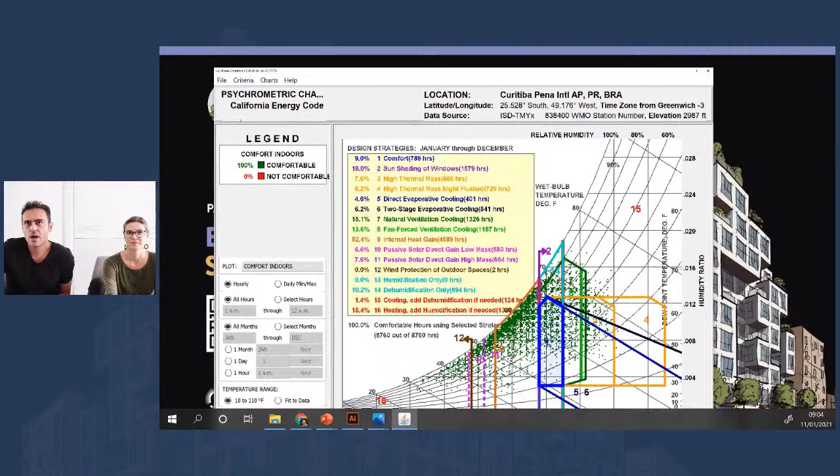Guys, we are going to share some slides so you can watch during the content, it's not going to be just us doing gestures. So we are going to present here: the first day of the Sustainable Architecture Week is going to be the behind the scenes of sustainable projects. We are going to show you guys some strategies to find sustainable strategies, it doesn't matter where you are. We are going to show you also some projects. We have this housing project, and we are going to show a mid-rise building as well. This is going to be the first day of this week, the behind the scenes of sustainable projects.

And who is going to be presenting this event? So my name is Philip Boni. I am an architect, LEED BD+C, and I will be one of your guides on this 5-day journey. And I am Semi Mira. I'm also an architect, LEED BD+C. I have been working with architecture and consultancy in sustainable projects for a while now. We're going to talk a little bit about our journey in a bit.

And the third person is Tiziana, she's going to join us in the second day. She's over there, actually. Let me show here, Tiziana is going to be here. Hi, people. She's going to be here in the second, the third, and other days in this event. So we are very happy to present you guys our team, our main team that does the presentations here at Ugreen, that is our company. We are going to tell about our history as well a little, so you can know us better.

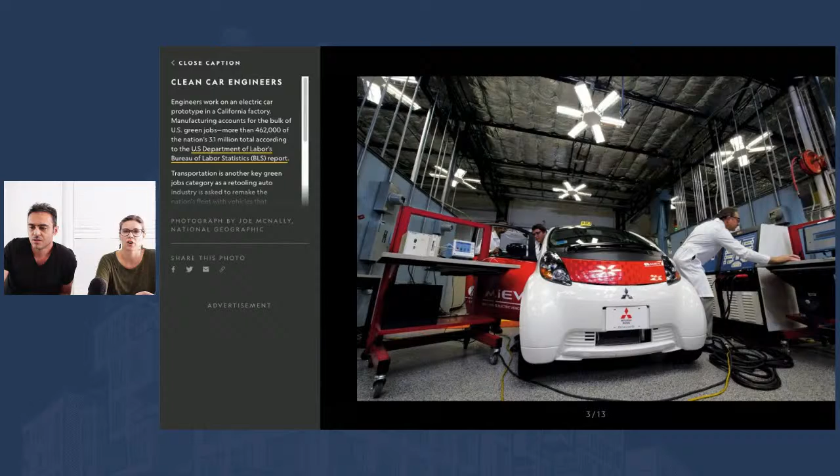So you can go on to the next one. Recyclers, absolutely. We don't have any more space on our planet for the amount of waste we produce, so we have to recycle and reimagine materials. This is something that's most important, and a lot of places are having big problems not recycling. Yeah, lots of materials we are making, so we need to do something with this. Exactly, we are drowning in our own waste.

Natural scientists, well, we keep researching. This is something that's not going away, and we're just finding out that nature has more answers. More and more we find that we have more answers from nature than anywhere else, and we are finally admitting that we can learn from nature. This is something that was important and is going to continue to be important, and more important over time, as our time is limited.

Yeah, exactly. We are also going to have solar cell technicians. We're making huge improvements in energy efficiency of solar panels, and there are lots of things studying this. We had solar panels with 12% efficiency some years ago, 3 or 4 years ago. Now we have 17, 19%, depending on the case. So this is developing really fast.

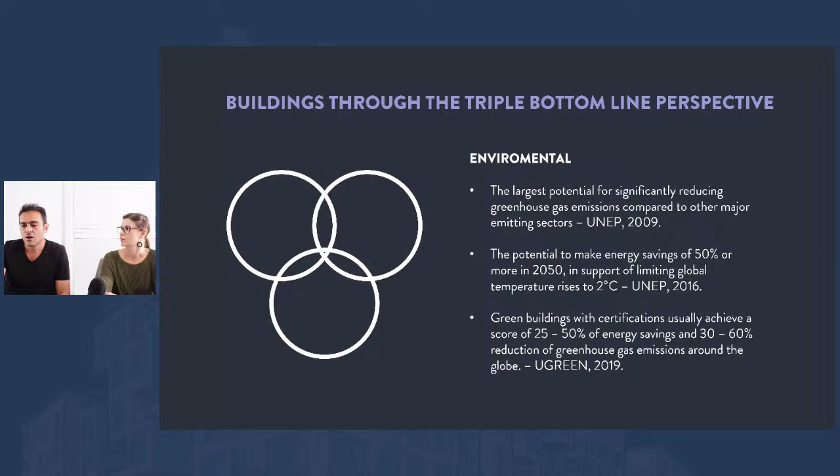And from the economic perspective, we can save money for tenants or households. We can have lower construction costs, higher property value, as we said before, and increasing occupancy rates.

7%, I think this is one of the biggest things, a 7% increase of asset value over traditional buildings. So if the building costs more, we get 7% more value, but it doesn't actually cost more. So you get 7% for free.

Most of the time, if you are doing sustainability right within your design, following a process from the beginning, sustainability will not cost a whole lot more, or sometimes it will cost less. It's just about understanding how you design, where you apply sustainability, and most importantly, when.

Social benefits: workers in green buildings can have a 101% increase in cognitive score. We brought this data from the CogFX study, and we got another one from Harvard from 2015. We want to bring more data so you don't just see one side of things, because studies sometimes have different results.

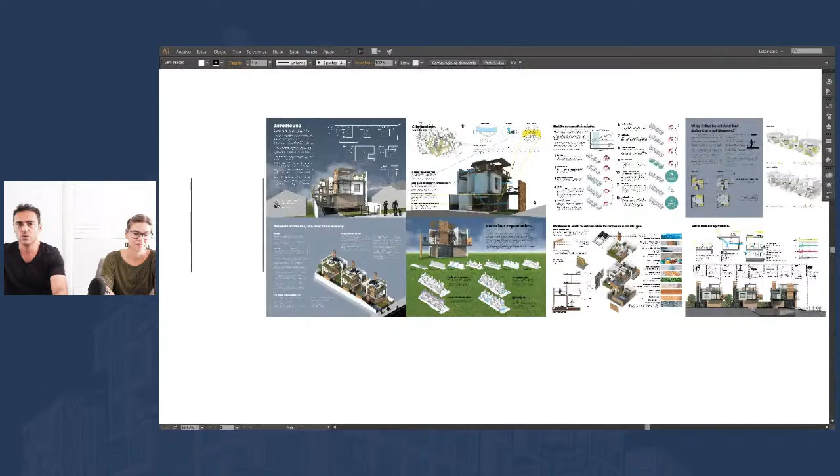Let's go, guys, behind the scenes of sustainable projects. We are going to show here a project. It's going to be this project here. This is a housing project.

We have a building project as well to show, but this is a house that we developed with sustainability in mind. Here in Brazil we have building sites with these dimensions, and we did this project to overcome a problem here in our country where people build a little building in a very large site. So we wanted to make this infill process, putting 3 houses in the size of 1, to overcome this density problem and also this housing problem that we have here.

We have this deficit, this lack of housing, and so we wanted to bring more houses for people because this is a very great problem here in Brazil. And we wanted this house to be a net zero house.

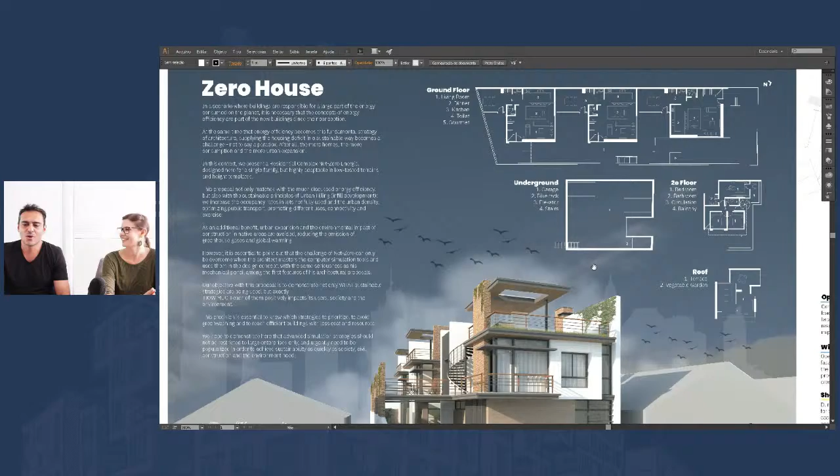So you are going to understand this process behind this net zero house, and of course you're going to get this summary. We put this in English very quickly because it was originally in Portuguese - we presented this project here in Brazil.

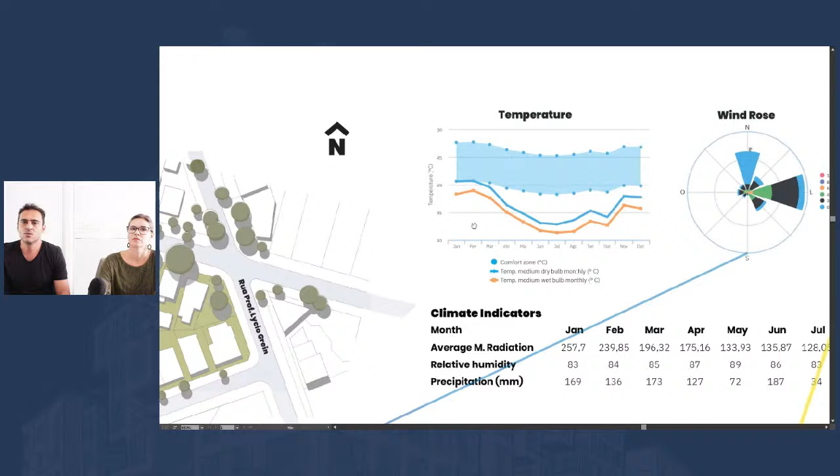To understand things better, you need to understand the climate. To make a project in a very good way, you need to understand the climate strategies. So we have this temperature data, you can see our history, our story, and now you know our temperatures, how they go. We have this comfort zone, and we need to make a building that can overcome this problem. Curitiba - most of you probably don't know it - but most of our hours are in the uncomfortable zone. We have a lot of changes.

Like in the morning we have, let's say, 12 degrees Celsius, and in the mid-afternoon we are at 30. So our gap is really big, and we enter the uncomfortable zone very quickly here. We have a very different climate. We are 900 meters above sea level. So we have this climate that's very challenging to work with for thermal comfort.

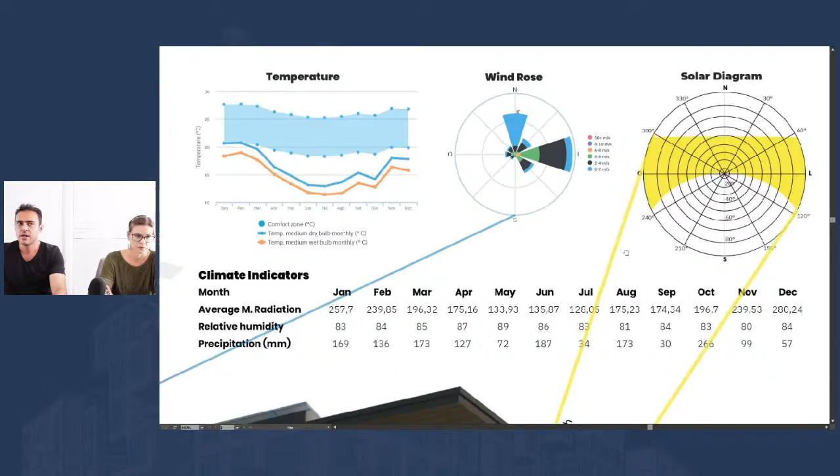So we have this wind from the east. We are going to use this, of course, and the solar diagram as well, right? And then, of course, we are going to mitigate the sun in the summer.

Here in Curitiba it's very hot right now, but usually it's not. It's January, here is summer, right? So in December we used some shading devices.

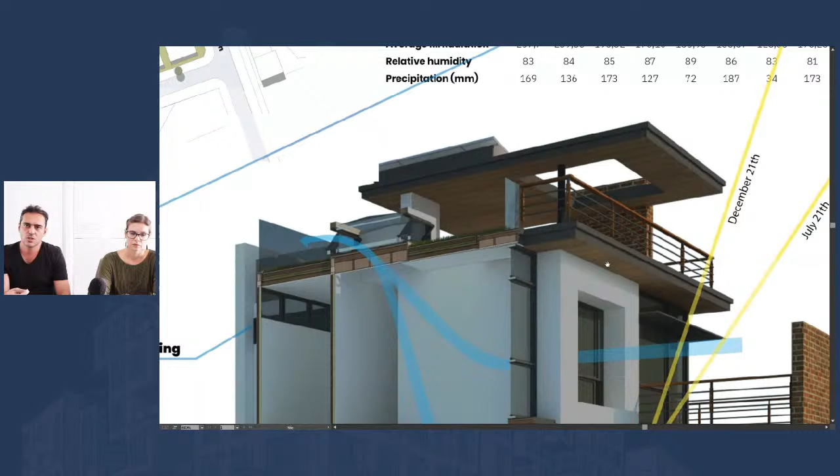And of course, this shading device, this distance, it was made on computer. It wasn't something I just put up and see how it goes. We measured on computer 80 centimeters, 1 meter, or 60 centimeters. We analyzed this and saw the impact on performance. So it's a very important thing. And this is east, so we got this principle in our project.

And we have here other important data, such as precipitation. So we can use this to measure how much water you can have in your building, to overcome flood, and also to save water, to use this water for some appliances of our projects, right?

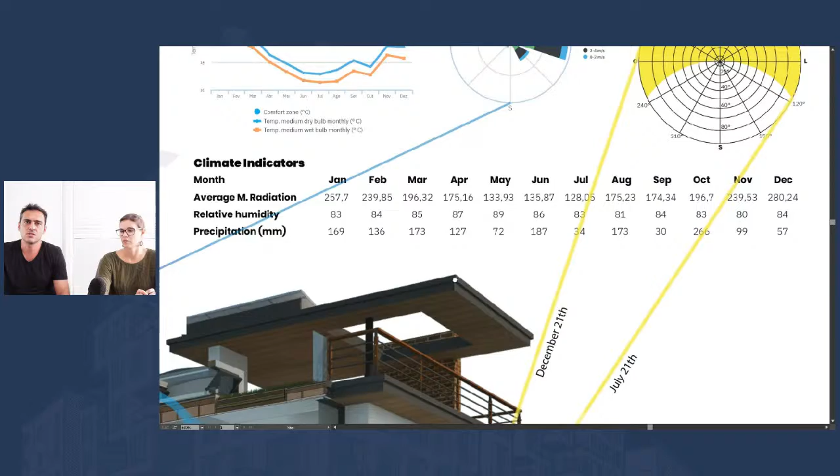Then we have humidity and radiation. We are going to use this as well, right? To measure energy, to use in simulations on energy efficiency, and of course for the solar panels that we have, 6 or 5 solar panels above the building, okay?

So these are important pieces of information that you have to gather at the beginning of your project. If you don't start with this, if you start with the form, if you start with the beauty of your project, then you already didn't give your first step towards sustainability. Your first step is to analyze your microclimate, your local climate, so you can understand how to use passive solutions.

And we're going to show you here a tool that you can use to analyze the climate in your region and start making this analysis from day one. These are important analyses because they will define how big your roof needs to be, how large your walls, what kind of materials your walls need, how many windows you can have, or where your windows are going to be placed, where you need more green to help with thermal comfort.

Where you can have the best location to avoid sunlight that would also increase your energy bill with tons of heat, or where you need the sunlight if you're in a cold zone. So the building orientation, all these things that you can direct in the first ideas of your building can reduce the amount of money you will spend on systems, things that cost a whole lot of money and that sometimes come later.

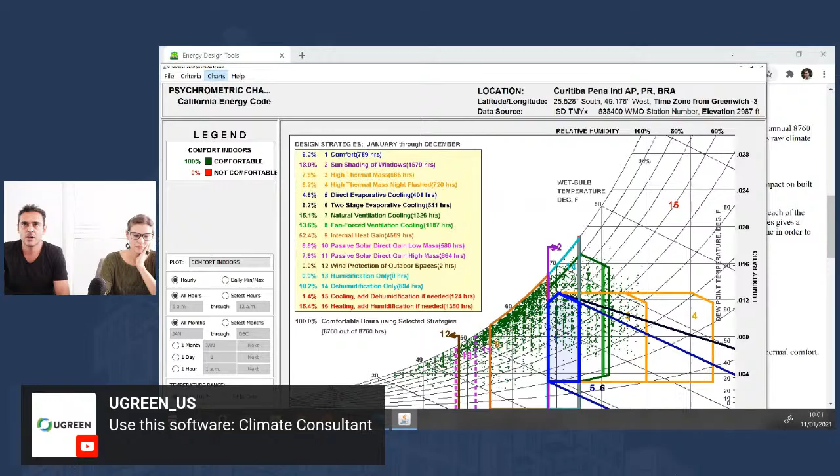And you are going to open the software, okay? I will just open a new file here. I will just click on this and click on file. Okay, start new project. I will click no. And now you will understand my climate, okay? Open existing EPW weather file, okay?

So we are going to get this file of my climate, okay? So this EPW, Curitiba, is my town, right? We have some others here: Manaus, a place in Brazil, Salvador, Abu Dhabi, right? São Paulo, and we have Lisbon, we have Egypt here. I know there's people from Egypt here as well. Phoenix, Arizona, so we have some places here. I will just open this, and of course you can get this climate data.

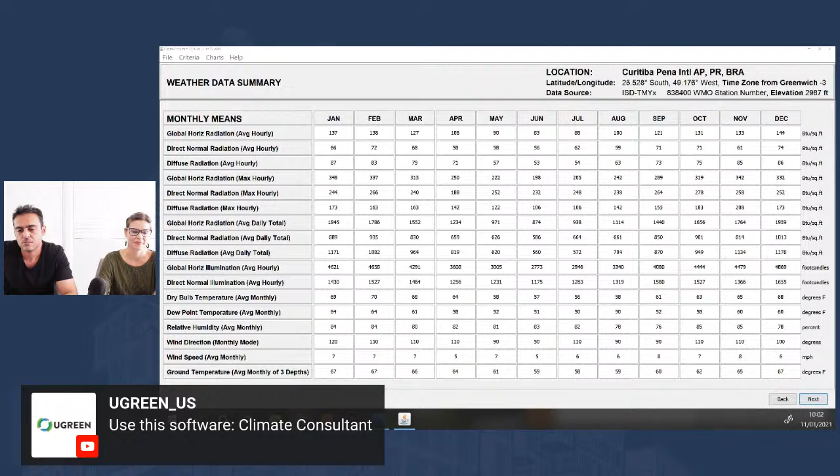I will just put up a very cool website that TC brought me some days ago, and this is the website that you can go to, okay? Ladybug Tools, so you type this, Ladybug Tools. I'm going to comment here.

Usually you are in the right place when you see this thing, this Ladybug here, in the images. You click on this, Ladybug Tools, and you can find the data from its EPW map. I will show you here: Ladybug Tools, EPW map, and you are going to find this EPW map. The file that you are going to use is EPW.

Let me hide this current comment here. We have climate data from the whole planet, right? You can get this, let's say one of this, you can just go here. All this is free, guys. You can access this Ladybug tool site for free, and you can access a climate consultant for free as well. If you are wondering, everything is free.

You can download this from one building website. You can just go to the map and find this. Since you already downloaded this, you need to open your climate consultant, and you are going to open this as start new here. Well, sorry, it's not appearing here because it's appearing in other screen that I have. So you can start a new project. You can click here and open existing EPW file, and you are going to find it on your computer.

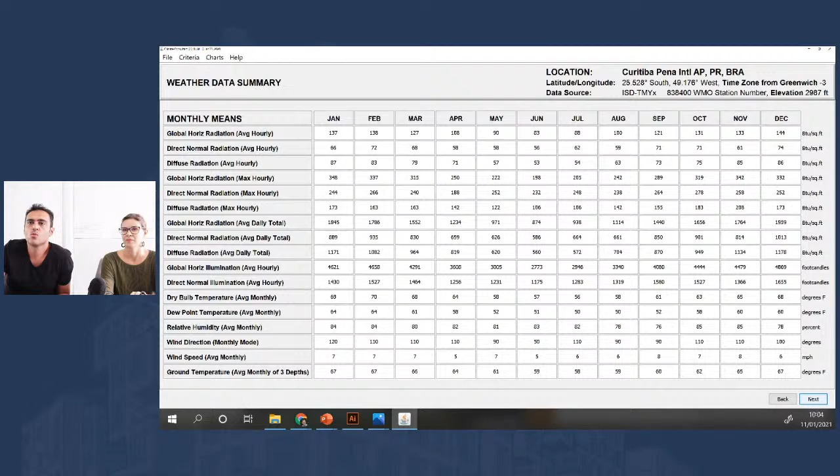So we are going to summarize this in just one screen. You're going to have lots of good things here. I'm just selecting this - ASHRAE 55 is one of the most complete things that you can analyze. I will just pass this, okay? You can change a little things here.

Now you can see the temperatures, right? We can see here in green our comfort zone, and the temperature, how it goes. So we have this medium temperature going up and down, and this mean temperature as well, and this higher and lower as well. So you can analyze this, but this is not the main thing that I want to show. We have this radiation thing as well. Maybe other things we can go here and talk more.

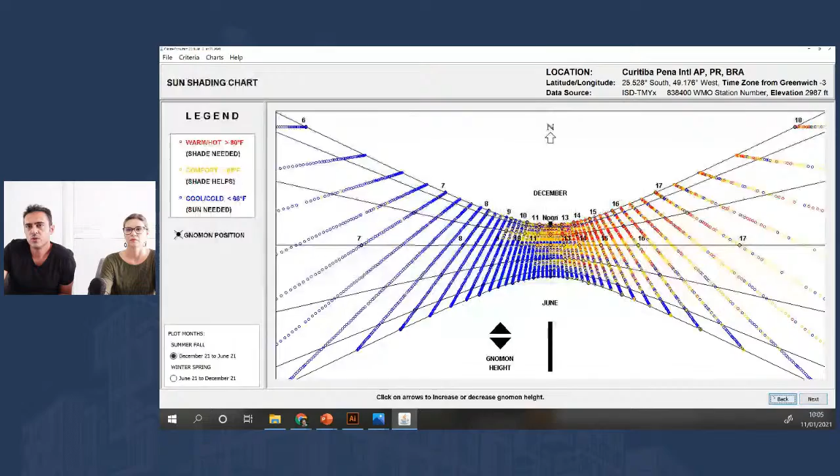But I like this thing here that you can use for your brise-soleil calculations. If you are not doing a building simulation, it's a great tool. And I love this, we have this 3D data, very cool as well. You can analyze lots of things during the year, but this is the thing, in my opinion.

And I want you to pay attention to this, very close attention, because this is what can make a very great difference in your project. So on the first day, you're going to get this. And what is this, guys? Just to mention for you.

So we have these green dots here. You can find these green dots here. This is the temperatures in the whole year of my city. So you can see here 10 degrees - we have Celsius. No, I'm just going to change here for degrees Celsius, okay?

Change units, Celsius - sorry, I thought it was Celsius. Let me just find here the units. I'm just clicking one screen and showing in another, it's very annoying. Change units, yes, metric. Okay, so let's go there again.

Now we have metric units, and we have 10 degrees negative, of course, and 40 degrees. And now we can have this temperature, understand this. Of course our city here is between, I don't know, 5 to 22 in most of the hours. Yeah, most of the hours, and humidity ratio as well. So we have a high humidity, you can see here, in most hours, and this temperature between these steps.

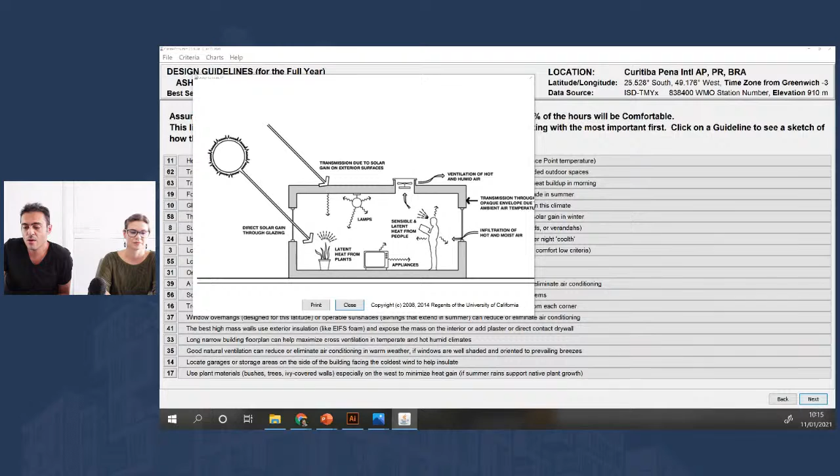So I've clicked on this heat gain here, and here's the strategy. You can do this, you can get direct solar gain through glazing, heat gain from lamps, heat gain from your surfaces and appliances, and even from people. So this is one strategy that's welcome in my city, right? People here in Curitiba are going to benefit from this. And for other strategies we have drawings, so you can find and understand them better.

Let's see here, glazing, right? We can use better glazing, better glass. Maybe I can find some glazing here and show people. Yeah, we have it here. We can use this glazing, right? We have some glazing strategies here, and this is very cool because we have this glazing with no color, and these two with intermediate color. So this is something you can do as well, use the best type of glazing. I'll speak about glazing in a few minutes, okay? I'll just finish this here, and speak about glazing later.

But we have this strategy, so we have these best strategies in order, so you can use them in your projects, okay? Guys, I think you are not going to make projects in Curitiba, it's unlikely, because 11,000 people making projects in one town is not going to happen. Maybe 50 people, but we don't have that big a city to do this.

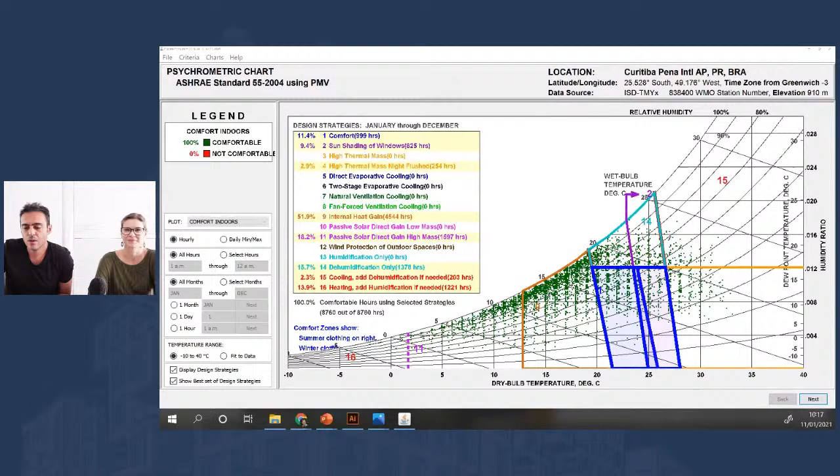So I will open another place so we can see it better. I will click on Start New Project. Let me show here, Start New Project, and I won't save this, of course, and I will just open another place. I will click here on Abu Dhabi, right? We have Abu Dhabi here. Let's see how Abu Dhabi is. I haven't made a project in Abu Dhabi yet, guys, but maybe if you are in Abu Dhabi and want us to work with you, maybe we can make this dream come true. So I will just click on next.

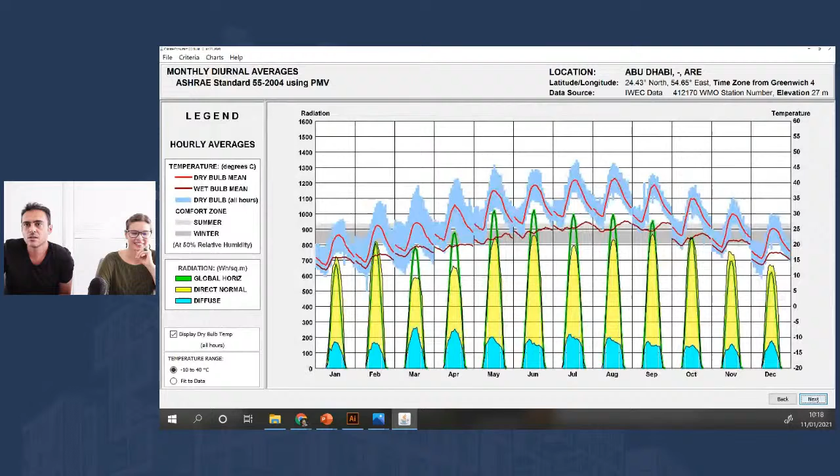Oh, we can see here, right? Temperature, lots and lots of difference. Wow, yes, we were all the way down in Curitiba, and now we are all the way up. So this is very different from Curitiba, and of course we are going to use lots of different strategies, right? Next.

Here we can see the hours of the year, these green dots, very different from our town. In Curitiba, it was like this with very high humidity. Now we don't have this high humidity, but we have a much hotter place, so the strategy is going to be different. Can you understand this, guys? This is crucial to understand.

Here we can see the comfort zone. Actually, we have more comfort zone areas, 13%. In Curitiba it was 11%. So we have more comfort areas, but we have very high temperatures here, and sun shading of windows is going to make a huge difference, 28%, not 9%. Very drastic difference, right guys? Can you see these green dots there?

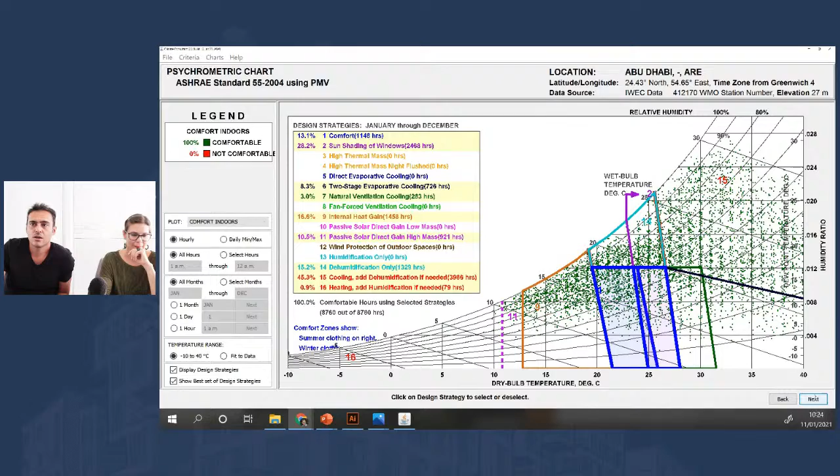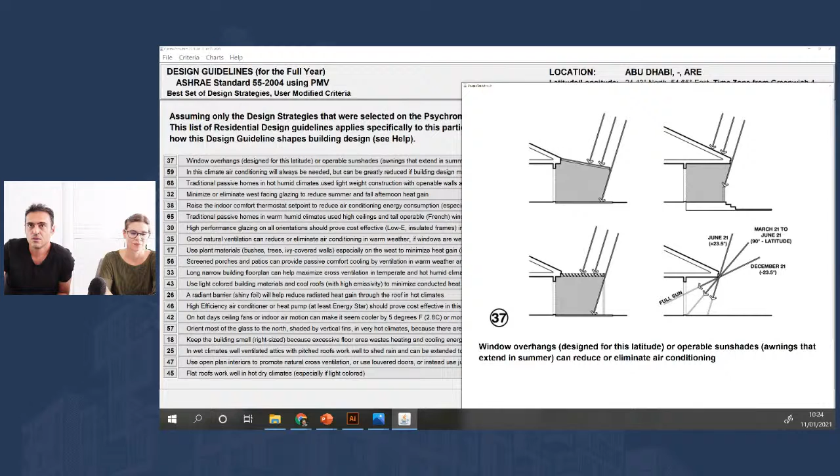So guys, we have these green dots here, and we can click on next, and we can find these strategies in here. So window overhangs, we can find here the strategies. For window overhangs, we can just see this strategy in detail, so you can find this and justify it for your client. And you can click on this 2030 palette, so you can find inspirations for your work, or show some reference for your clients. So I'm clicking here, and we got this website here.

And these are all projects that have prizes, or have big achievements in sustainability. So you will have inspirations that make a whole lot of difference and can open up your mind to the many different ways to design.

So we have this, and of course you can see here some shading devices. There are some cool tips here, and you can find this strategy, some ideas. I don't like this one, I think it's not beautiful, but of course, guys, we're not judging here, we're showing.

I put some of our projects in. Maybe people won't enjoy it, but they'll probably be judging you too. Yeah, it's going to happen, it always happens.

Guys, just to understand, a good project is not a project that you go outside and see a beautiful facade. Of course, a project is a thing that people live inside. So we are showing you here these strategies, some shading strategies, and other strategies as well. This exact reference you can have here.

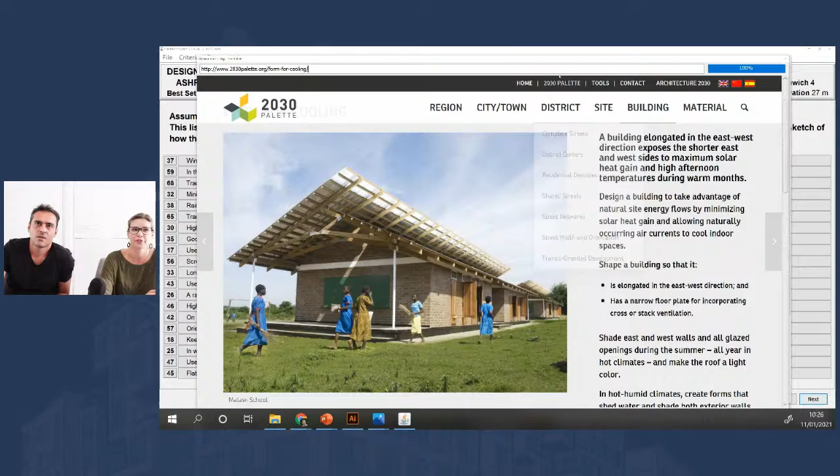Guys, we are just showing you one little thing about your sustainable journey that we are going to pass. This is just the inspiration part, right? How you get inspired for your project with the right data. If you do this, you are going to get outstanding results, but you are going to see other days what we prepared for you guys, okay?

So this is it, some very cool project, I love this. Look, it's so beautiful. We have biophilia, natural light, natural ventilation, and you can see there's not a whole lot of systems, and it's a building that has lots of thermal comfort within a place that's hot.

We are going to put some links in the summary, and a recap website, so you are going to get this. Okay, yeah, this is more like Abu Dhabi. Very cool, it's in Guanacaste, Costa Rica, but it's more like, yeah, very beautiful projects here.

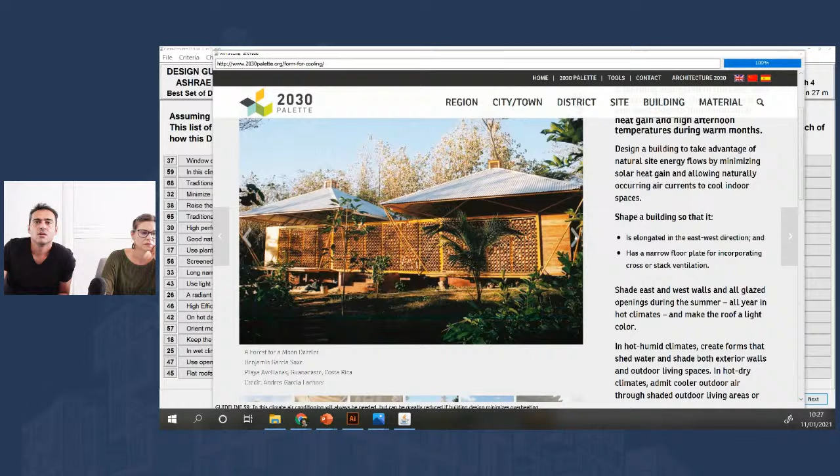So guys, I think you understood this thing, right? I will just show one more city, just so you can see how Brazil is. We have very different climates in just one place.

Change weather data here, start new project. I will just click on this, open EPW data file. I will just open Salvador, it's a place here in Brazil, in the northeast, a very, very beautiful place. And you are going to see how the climate behaves in this place.

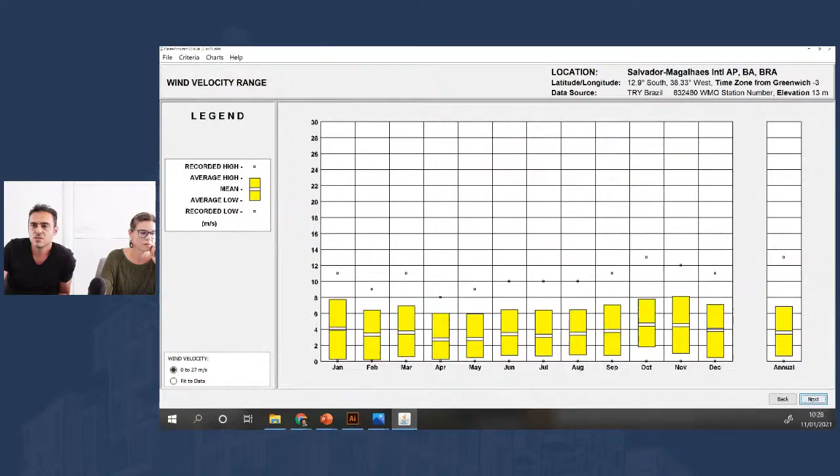Show best set of strategies. We can find this, not many strategies that you can use. And here you can see the strategies on Salvador.

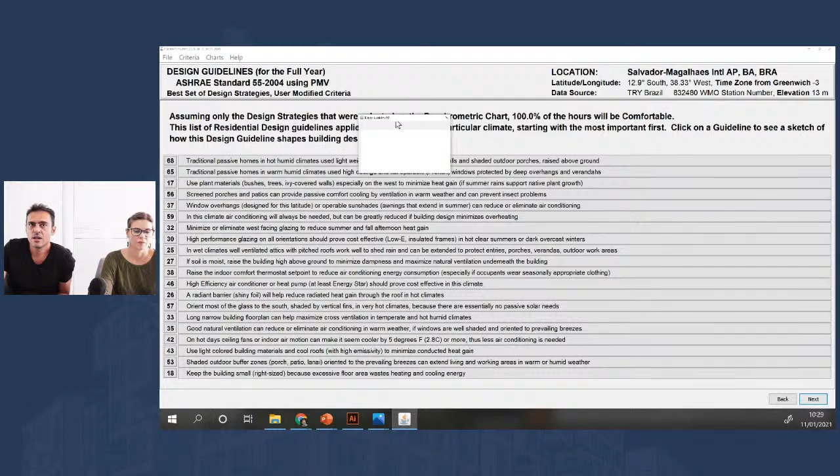So we are increasing natural ventilation. You can see these areas here of this building. We are increasing ventilation as much as we can. And you see the overhang there, the roof.

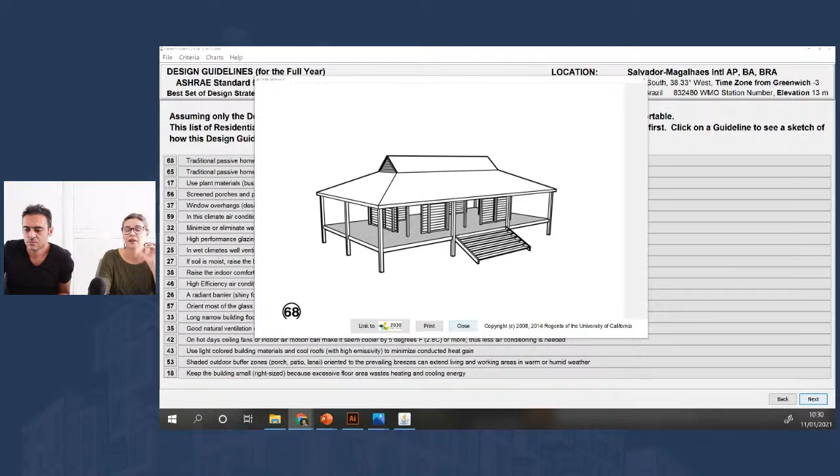This is what I'm talking about. Like, I was by the beach side and people were building without this. So guess what? They're going to spend a lot of money in air conditioning to make this house comfortable. And sometimes they think, oh, but an air conditioning machine is not that expensive. But you will get a whole lot in your energy bill.

I'm putting here the software so you can download this. You can see ventilation even under the ground, under the floor. I lived in Key West for a couple of years, and all the houses are like that. They have big overhangs and they're raised above the ground, so you have air circulation all over the place.

We should bring Key West maybe. Key West, in the future.

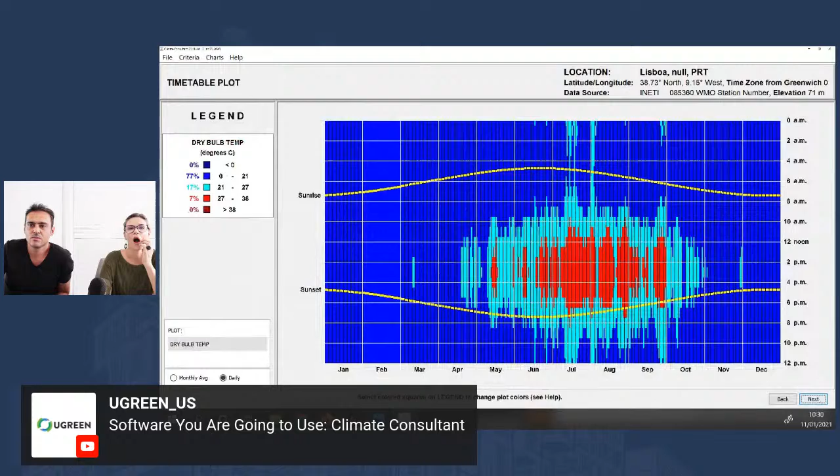I will just open another one. I saw a person from Portugal, so I'll show some places that are cold, since a few people wanted to see the difference. I got Lisbon here, so you can see Lisbon, we have this temperature here. Sun shading is like Curitiba, right? We have similarity - hey guys from Lisbon, we are in this together, a little, not that much, but we are more in this together. Passive solar heat gain, internal heat gain as well as Curitiba. So very cool strategies, and this is the way to go, guys.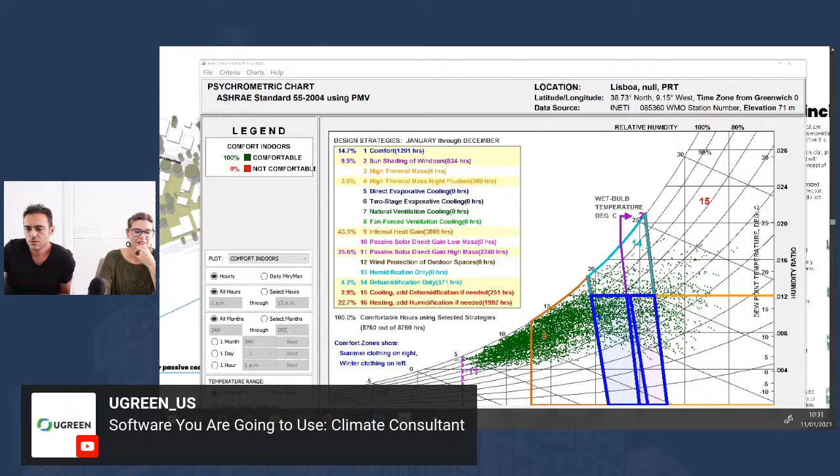So this is how you can use this, it's okay for everyone. I think you got this, and I will just close this right now. Click on, because I don't want to have many softwares open, we can have problems doing this. Just a little bit - I will just remove this commentary thing here, and close this software.

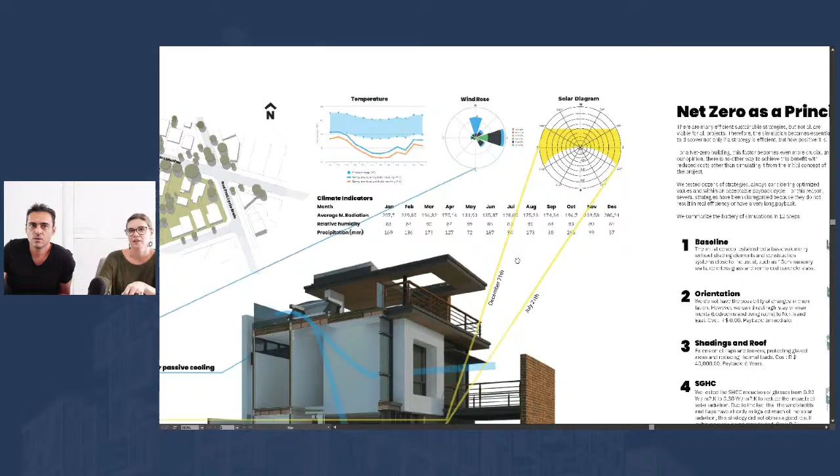Okay, so guys, all this to explain these strategies - that's how we started with these strategies. So we have openings in the west, we minimize the openings in the west so we don't get much heat gain from the west. Lots of wind from the east. The shading we prepared on building simulation - actually we saw climate consultant, but we do some things directly on building simulations.

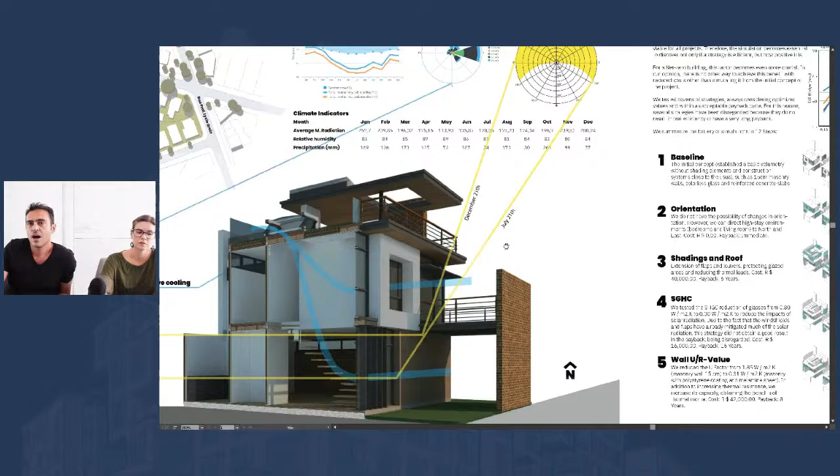And we are going to speak more about this tomorrow, okay? In our next class, we are going to open Energy Plus, and we are going to analyze these things directly in the software, how we can increase building performance, okay?

Then we have this principle to get net zero energy, right? We need to analyze lots and lots of great things, because to achieve net zero, you don't want to put 50 photovoltaic panels in your project. This is not the way to make it net zero, right? You need to really improve your building performance, and then later you can use solar panels.

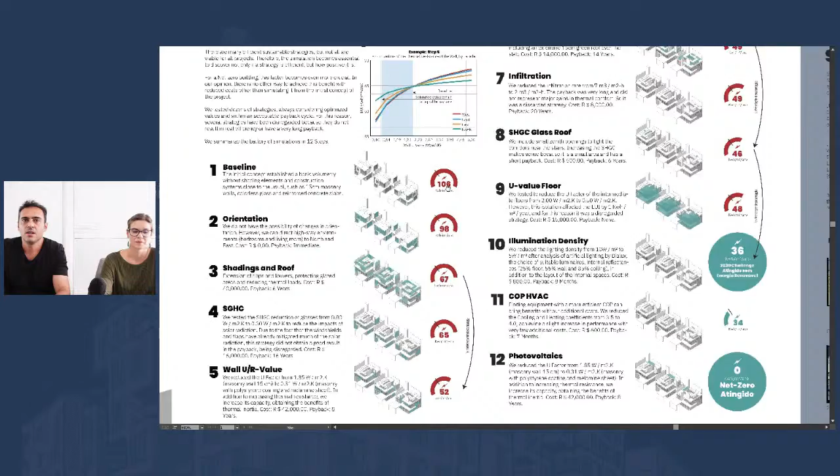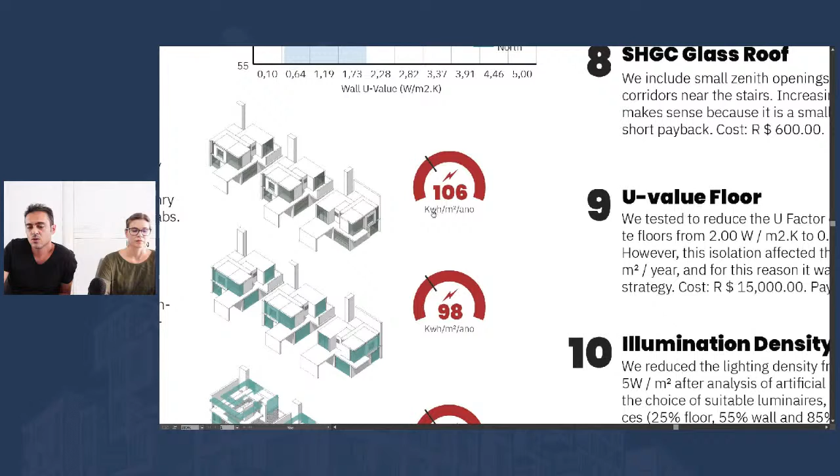And we did this in the end of the process, so we can see here this consumption. We had this at the beginning, 106 kilowatts hour - so each square meter of our project, we got 106 kilowatts hour per year. Here is 'year', okay? 'Ano' is year in Portuguese - we made this very quick translation for you guys. So kilowatts hour per square meter per year, 106.

And then we reduced this with some sustainable strategies down to 36. And of course, you need to analyze the payback - you need to analyze, when you are using a sustainable strategy, in how many years you are going to get this money back. So very, very cool thing to do as well.

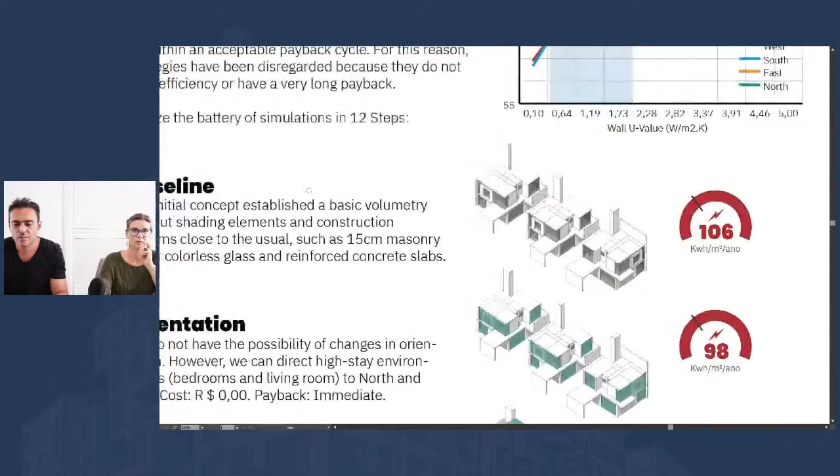And then we have this, we call this baseline, because that's where, when we start a project, we develop some plans, we develop the idea of your project, and then we do some changes based on energy efficiency. Of course, you are doing the project and analyzing things at the same time - that's what I believe is the future of architecture. You are developing your plan, your elevations, your building idea, and making it even better with energy analysis during this process, not after, because after is going to cost lots and lots of money. When you do this before, you make a huge improvement without many extra costs.

So we have this baseline, we have this 106 consumption. Then we changed the orientation, and we got a slight improvement here - not that great improvement, but it was great.

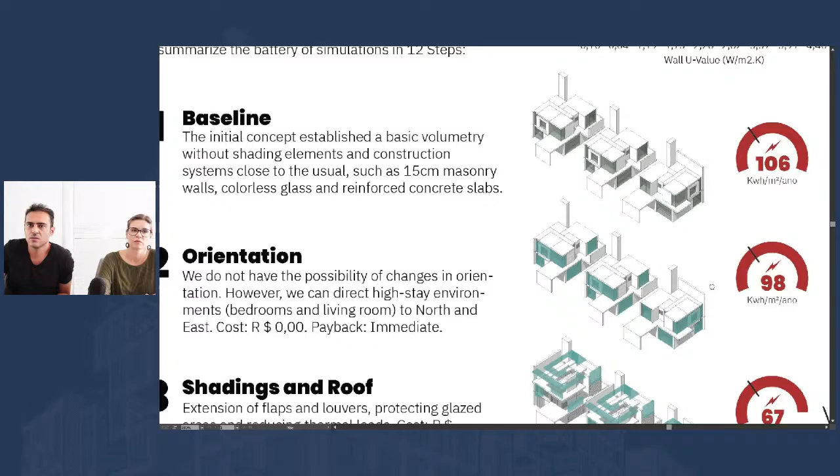Then we have shadings and roof, and then we used this shading - you can see here the project, right? You can see all those shadings we have in this project, all this stretch. I think we can see it better - let me show here the next page. No, this page here - just 1 minute, guys, we are going there, lots and lots of software open here.

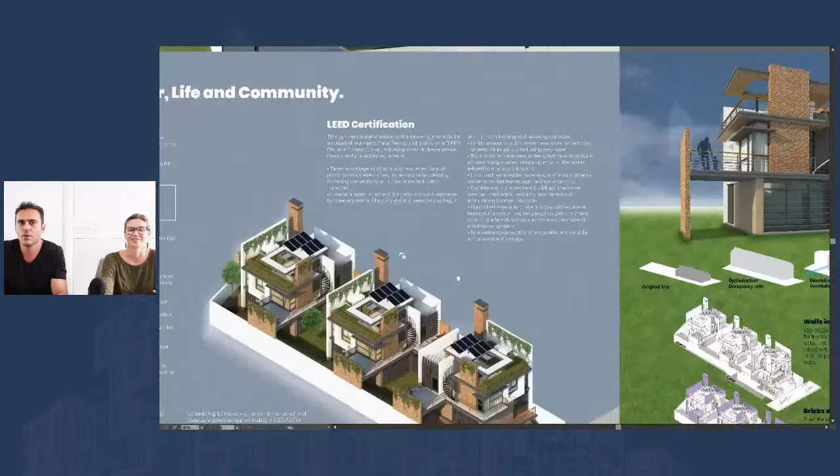And here we can see this house project, and we have these shading devices. We did this to improve energy performance. And we have photovoltaics to make it net zero in the end of the process. So shading devices, we did this on building simulation, then we got a very cool improvement on the energy consumption.

We are going there, just one minute. Don't be dizzy here, I'm sorry.

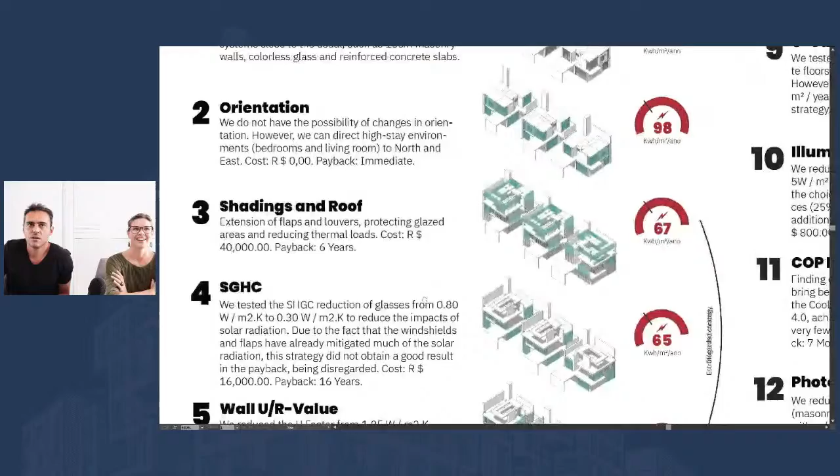Shadings and roofs. So we did this very cool performance analysis here on shading devices. Then, guys, we changed the windows, so the glass of our windows.

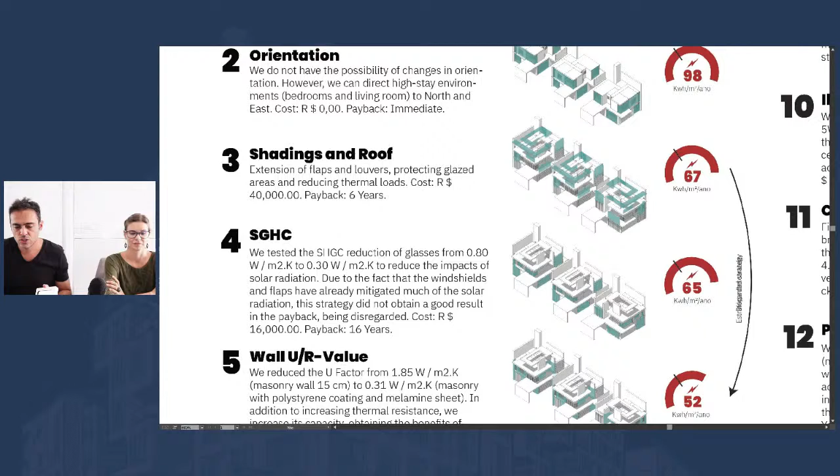So just to show you here the main idea, we changed the SHGC, the solar heat gain coefficient. What is this? Think about this window, this glass here. We have a solar heat gain coefficient of about 0.8, okay, 80%. What does this mean? You are going to get energy from the sun. Let's say 100% from the sun goes into your window, and 80% is going to become heat in your building. So it's a lot, right?

100%. So if you are doing a glass house here in Brazil with this type of glass, you are going to cook people, okay? So maybe if you are a cooker, or a chef, this is a way to go.

But if you are an architect just like us, it's not the way. So with 100% of sun energy, 80% goes inside your building. But if you are using a glass with a solar heat gain coefficient of 0.4, 100% of energy of the sun, you are going to get 40% inside your building.

So we are going to make a huge increase in performance here using this type of glass, and this type of glass as well, which has 0.3. So 100%, only 30% goes inside your building. So if you don't want heat in your building, this is a way to go. But this is costly, this costs lots and lots of money.

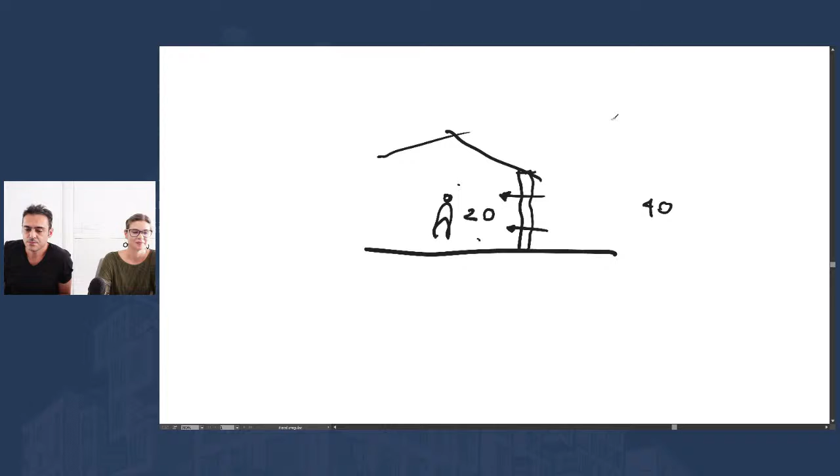So if you have the U value, let's say the U value is equal to 2, to make it very simple for you. We are going to have at each square meter, it's a very quick calculation, 2 multiplied by 20 by the square meters of your building. Let's say here we won't do this multiplication. So at each square meter, we are going to waste 40 kilowatt hours. That's a huge value.

But when we have a U value of 1, with this same 20 degree difference, we are going to use only 20 kilowatt hours. When we have this 1 instead of 2, with this huge difference of temperature, we are going to use 50% less energy on your project, because the walls are making the job to avoid the sun entering the building. Okay, so this is very important.

Just to mention here some Brazilian materials.

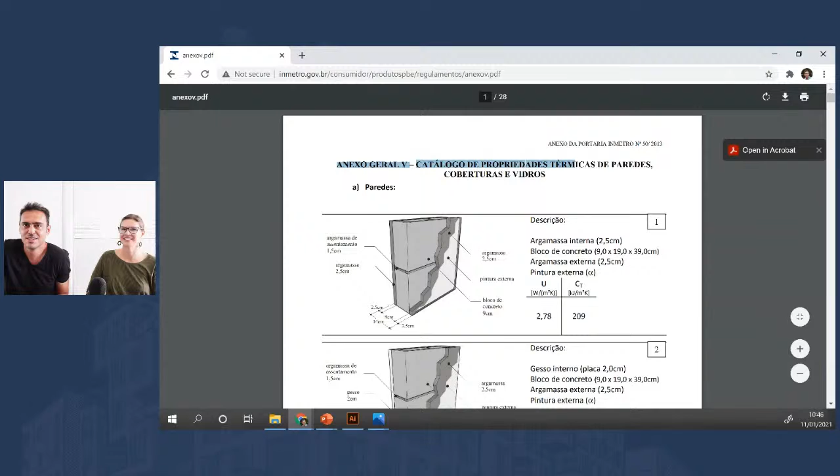So we have this U value here. We can see here this 2.78. So this is very high in most places, so this is not a cool wall to have, and we need to decrease this. And then we have lots and lots of types of walls. You need to find your place, okay? We can't find your place for you, but you need to find this.

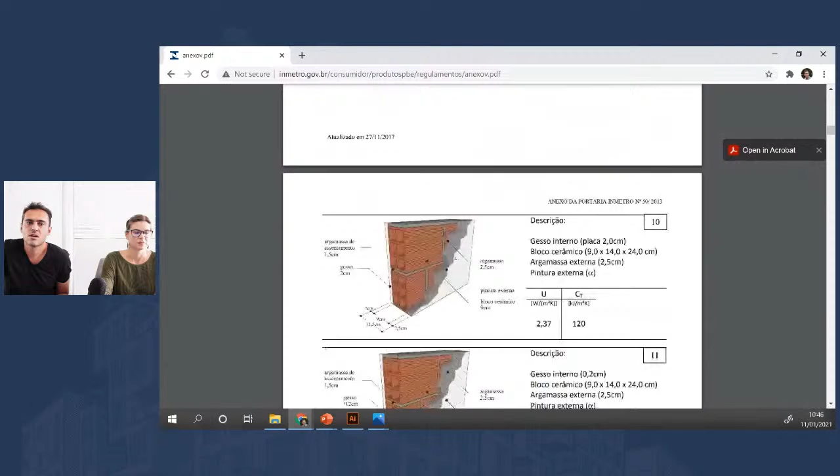So for those who don't know what U value is, it's the thermal transmittance, the capacity of the materials.

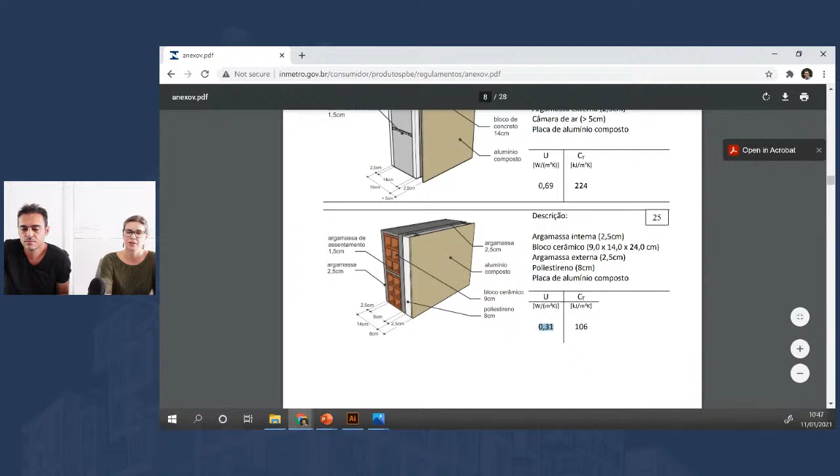You can find this in many different websites. If you search for materials and the U value of materials, there are many websites with information. We're looking at one that's in Portuguese because it's what we use most, but you can find this in English or in many different websites from many different countries too.

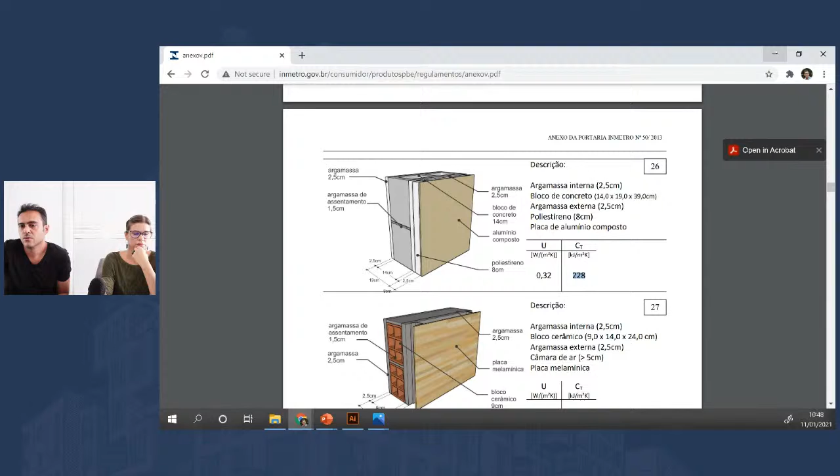And this is it, guys. Just to show this, we are going to cover it again. I know we are showing tons of information, a lot of information we are making here, but we are going to cover it again during the next days, a little more.

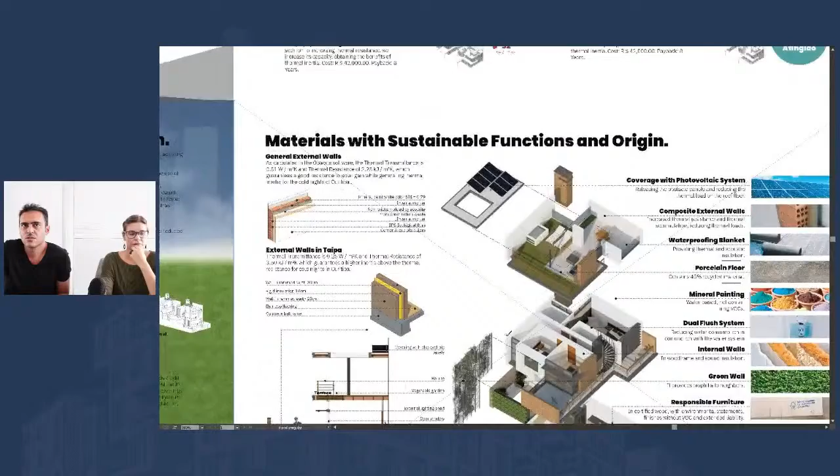So I was talking about SHGC, the U value of the walls, and infiltration. We have the U value of the roof, same as the wall. We saw this, we got an improvement. Infiltration is when we try to close the gaps in our windows and building. In Germany this is very important, air tightness - that's why they have passive houses over there and in lots of places in Europe. When we have a lot of difference in temperature, this is a very cool strategy to use.

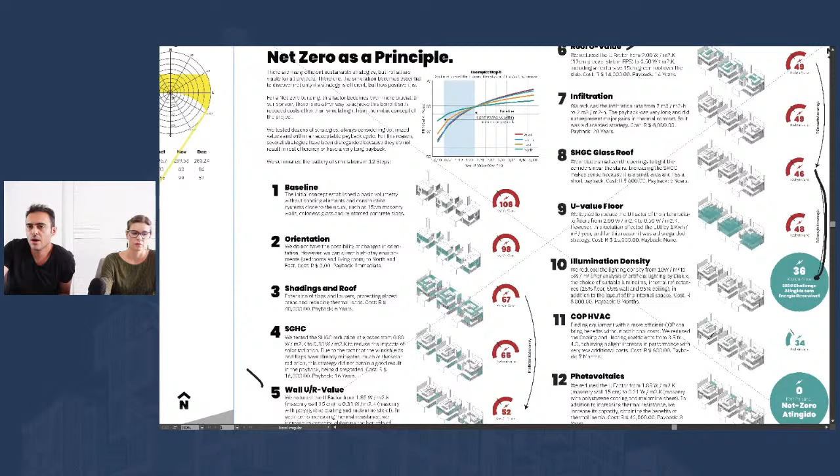And we used infiltration, SHGC of the glass, roof, and U value of the floor. We tried to change the U value the same as the roof and wall, but changing the floor's U value didn't have a good impact, so we moved on. Then we improved the air conditioner performance using better equipment, and got from 36 to 34. When we got to 34, we used photovoltaics to make this a net zero project.

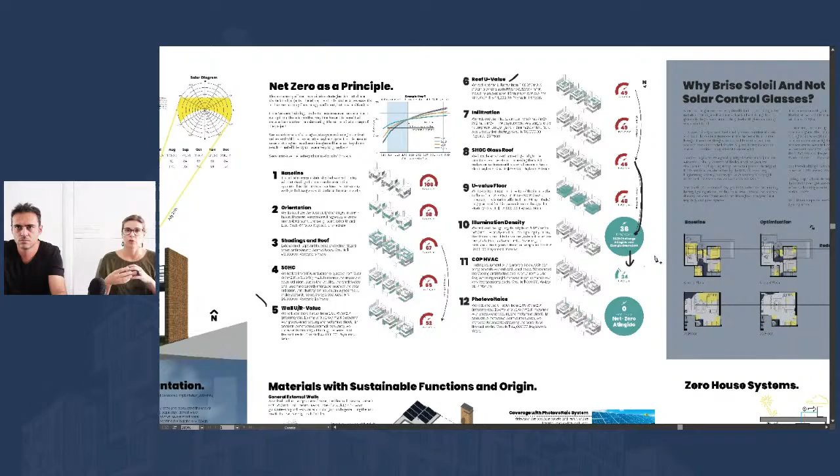So you see the whole process, the things we went through with the help of those tools we showed you at the beginning. Do you understand the importance of the process? You see what really makes an impact and what you can just skip ahead on and invest in something else. There are many ways to change this based on your design and the input of your client, but at least you'll have the information on where would be best to change and where things are most important in bringing results.

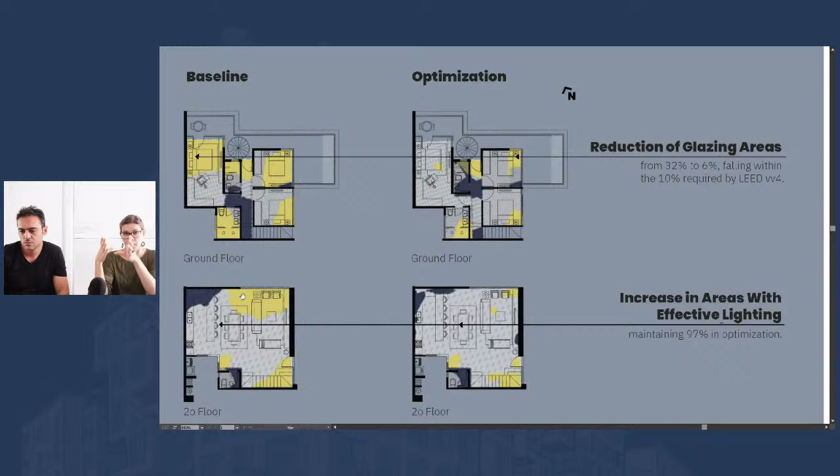Energy is something that's expensive everywhere, I guess. There's no country where energy is free for all - we're fighting for that but not getting there anytime soon. So energy costs no matter how you invest, and even if you invest in solar panels and go off the grid, you're still investing in the equipment. So if you reduce all that based on this process, you'll have to pay for 34 kilowatts rather than 108 with bad choices.

So understand the importance of climate analysis at the beginning of your design process.

We're going to speak a little about lighting because we'll cover more on the third day. So we have this baseline and optimization we did. You can see lots of yellow dots and yellow areas here - these are glare areas, lots of glare. Then we made changes to reduce these glazing areas, and we reduced it a lot. Light distribution - these dark areas are bad light distribution, so we made it better in this project. In this very dark area, we put a little window.

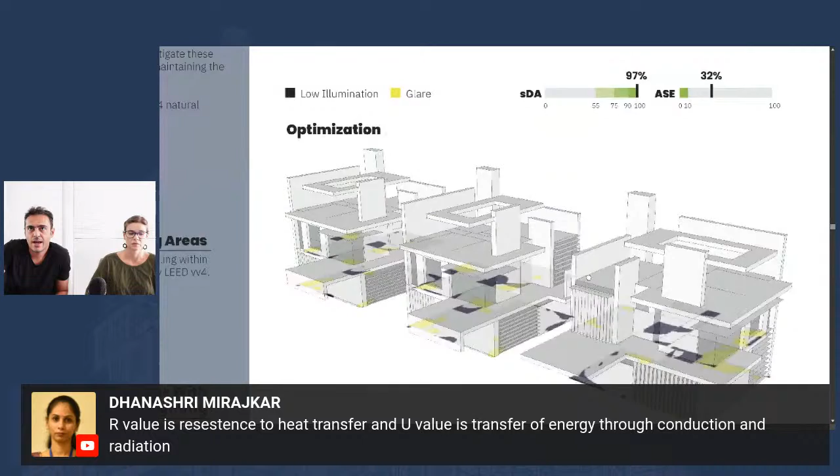This is a way to see things and make your building performance better. We used data called ASE and SDA. Before, we had very good light distribution in this baseline - 97% and 32%. 97% is very good, but that other number is very bad. So we removed the glare while keeping the light distribution. Usually it's very hard to do this, because when you increase light distribution you increase glare, and when you reduce light distribution you reduce glare too. We achieved 6% glare in our areas and 97% light distribution.

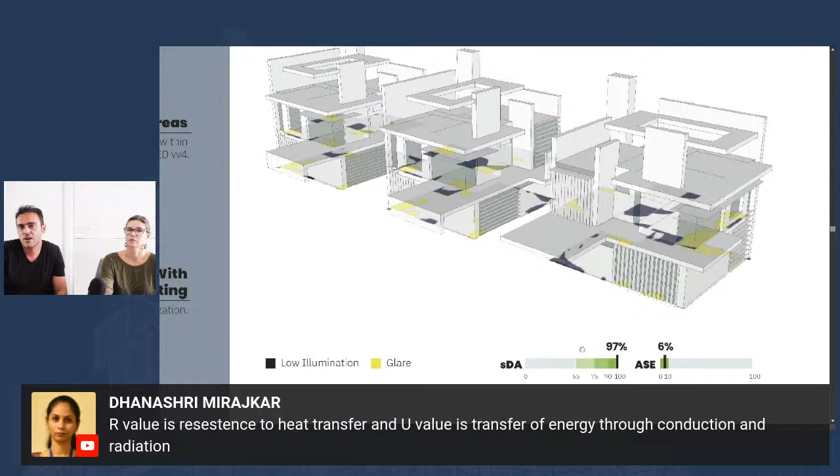So we improved this a lot, and this is our way to go, guys. You need to do building simulations to find this process. We'll see more about this on the third day. But this was just to show the background about sustainable projects. I spoke a lot, I think. Sammy, do you want to speak a little? I want to talk a bit.

We started with things that are most important and more expensive: making the actual shape of the building, thinking about how much materials you're going to spend, and then the energy analysis with the climate database. Then we have to think about water consumption and everything else that composes this design. We understood that many places can provide us with a baseline, so we used LEED certification to get this baseline and understand how much a building like this would consume, and how much we can reduce using better equipment in bathrooms and sinks.

Nowadays, I believe this is true in most places: we have bathroom fixtures that are water efficient and basically the same price. At least here in Brazil, they're basically the same price. There's no reason for us to buy something that uses more water or is not efficient for the building.

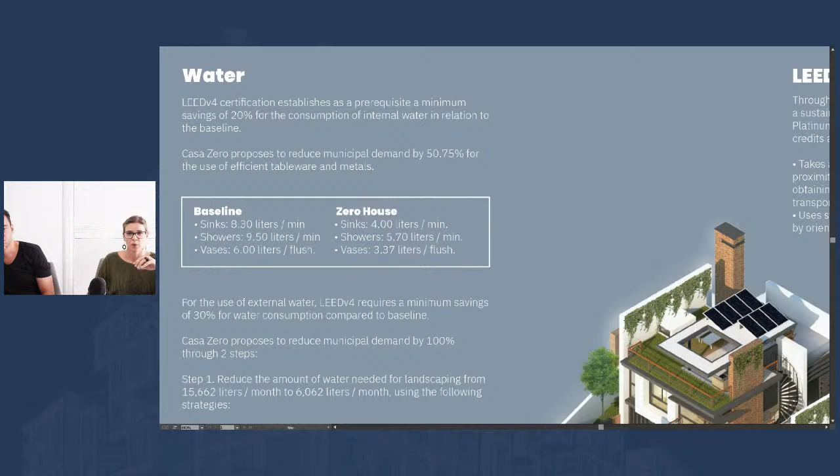I actually had neighbors over the other day and we were talking about water savings. Here in Curitiba, even though we have lots of rain, we went through a big drought, the whole of 2020. We had to find alternative uses of water because of the drought. Some days we didn't have water coming to our tap, some days we did, it was all on a schedule. It was very hard, and this is a place where we wouldn't expect this to happen, but climate change has brought this new scenario to us.

Many people started being concerned about how we can reduce water use. In my building, people were talking about how their showers are 15 minutes, 10 minutes, 5 minutes, but they weren't talking about the water flow of that shower. Nobody talks about water flow. This is what I'm telling you about educating your clients: sometimes they only think of water in minutes, not in how much the fixture in their bathroom is actually consuming. So it's very important to analyze this.

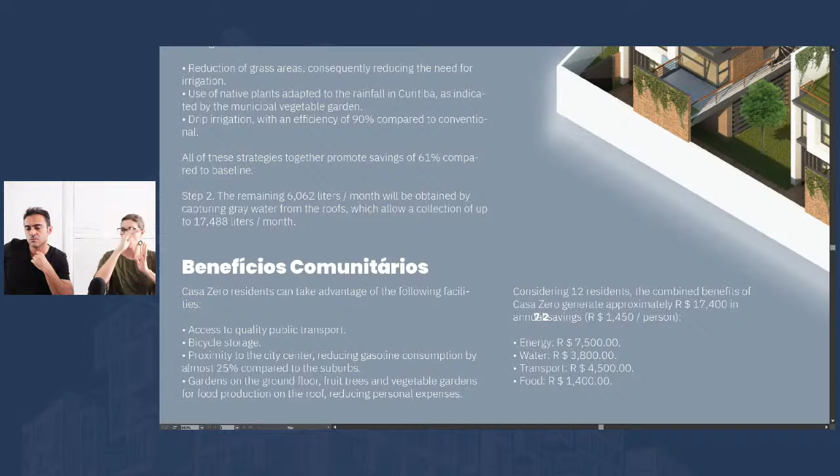Yes, this is a way for us to present how we made this a process, how we brought sustainability into a process. As you can see, we have steps of what is more important. Of course, energy and water are always at the top, so building orientation and how you can get these savings are always an utmost concern.

Then you talk about these benefits from the community, because you want your client to feel that he's contributing with something bigger and that he has alternatives, that he can save on gas by walking to amenities in the neighborhood, or that he can have a healthier lifestyle by walking, having a park close by, or having things that are interconnecting. With this project, we gather many of these alternatives, like bike storage and things that improve their lifestyle, not just the building itself, and then you start going through this process and merging into the life of the client, the person that is going to use this and live there. And when you live inside a place, this place is part of you and it's part of your health.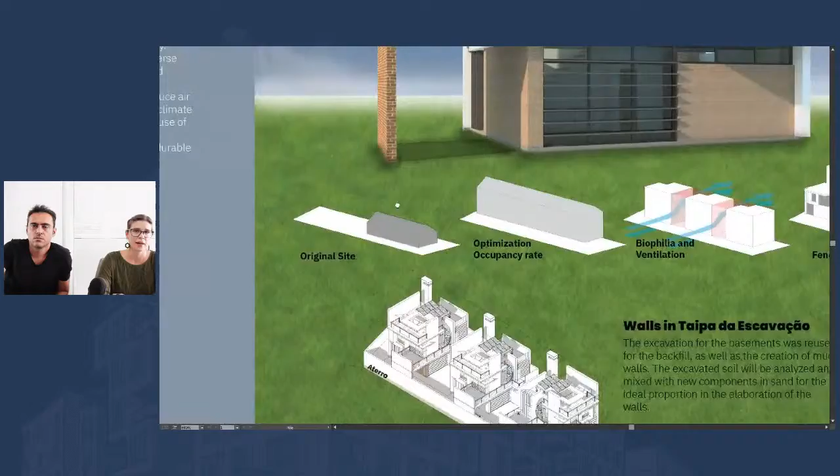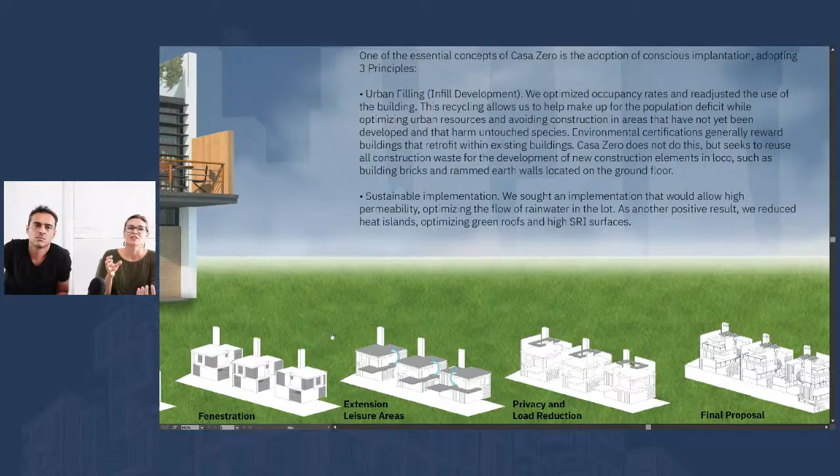So as you can see here, when we decided to start with this, we made this conscious choice. When you do your site analysis, you need to understand that sometimes you have the potential to build a lot based on legislation, but not always fulfilling the potential of the site is what is going to make it more sustainable. So we made this analysis where we went from what is the use nowadays, what would be the best value for the client, which is that very dense area right there.

And then we started to insert and break this element towards decisions with climate, with biophilic design, thinking of how we can reduce energy loads, thinking of how we can get natural light. And then we end up breaking this towards 3 houses. This is not a decision that happens just based on your imagination or your design feelings. This is something that's a process, based on legislation, and based on sustainability in every aspect that you can bring in.

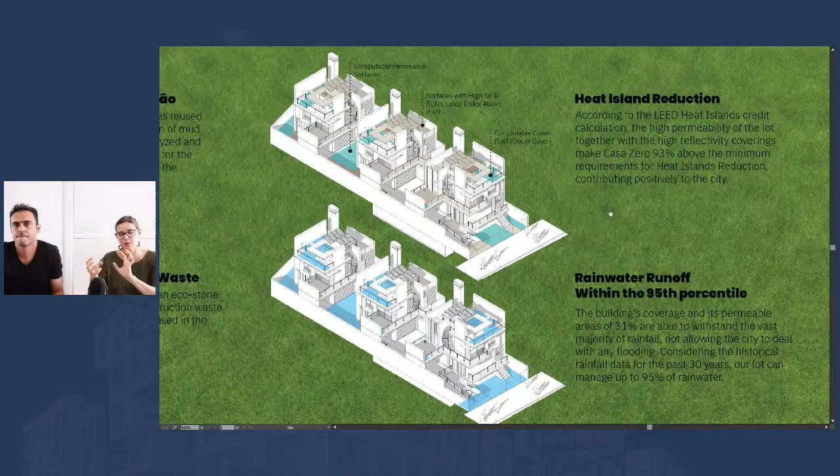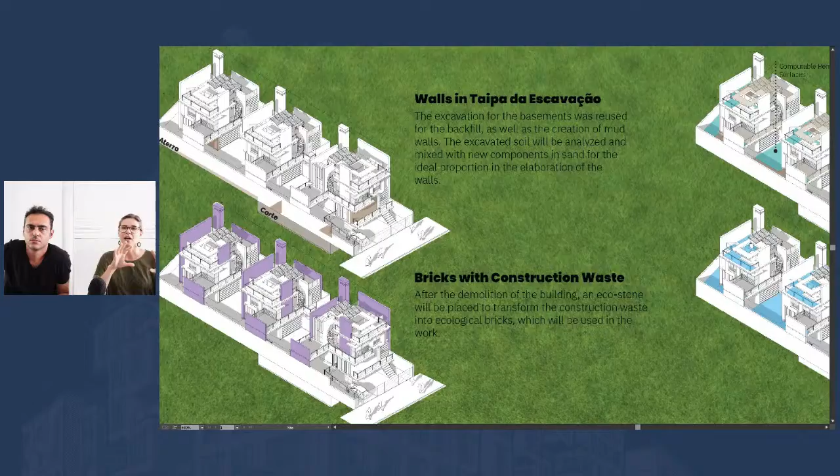Like Felipe says, we're going to go through these steps based on our roadmap tomorrow. We're going to start this roadmap. But this is, you can see us using the roadmap in a real presentation for a client.

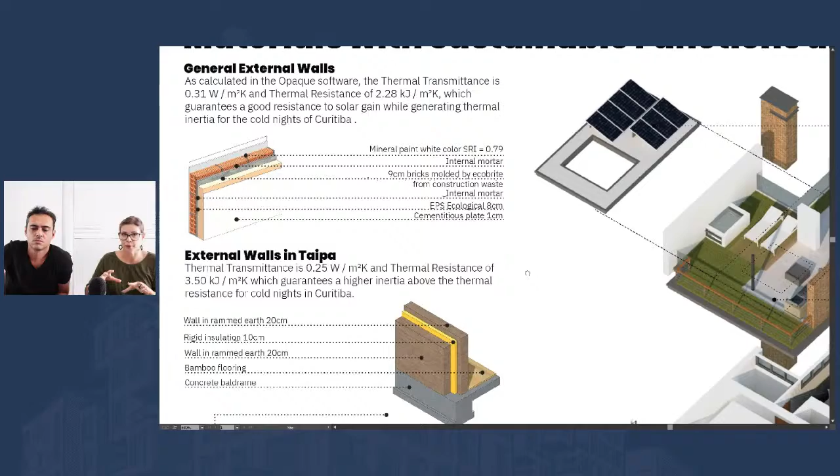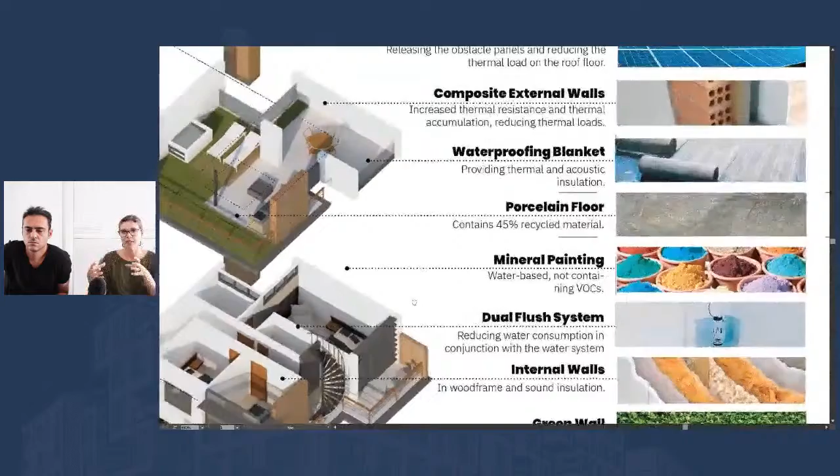Then we have building materials, guys. Very important. And when we talk about materials, you're going to hear me saying this over and over during this week. Materials are very important. They are the biggest carbon footprint that a building has. It's not in the operations and maintenance, because operation and maintenance, if you do an energy and water efficiency analysis, you can reduce the impact of your building operations. Once you put this carbon footprint in the form of materials, there's no taking away. You already imprinted that. From day one that you have built, you have 50% of your building carbon footprint already set with no going back.

So that's the importance of choosing materials, choosing locally, choosing materials that are not a burden to the environment, choosing materials that are efficient for your thermal comfort, choosing materials that are not toxic for the health of your clients. Once you put this in first, you're already reducing the impact on the carbon footprint on that 50% that materials are responsible for. That's it, and materials contribute to many other things.

Yeah, you need to think like Britney Spears, right? Because sometimes we are addicted to using some building materials, but some of them are toxic. So remember the music? Did you just mention toxic? I'm addicted to you, but you know that's toxic. Yeah. Sorry, wow, Sammy, I'm sorry guys, I didn't let this... We talk about sustainability and pop culture here. Yeah, they won't forget anymore. They won't forget, I can promise you this.

Okay, so let's understand here that when you choose materials, it's best to understand also that not all materials are sustainable for your area. Some people talk about bamboo, oh my God, bamboo is so sustainable. They are rapid renewable materials, but are they in your region? Do you have it locally planted? Here in Brazil, we don't have many places that have bamboo, and the ones that are local are not abundant.

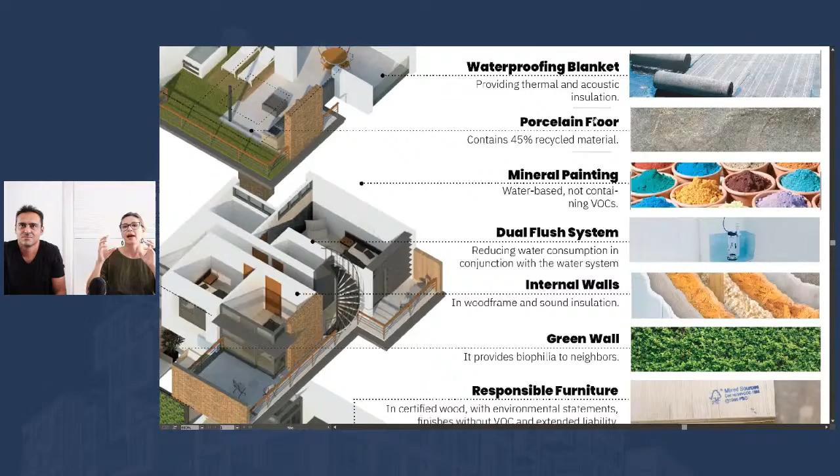So if many projects here are using bamboo, we're not being sustainable, we're doing greenwash. And this is the choice that you have to make. Sometimes you may have a material that is not the utmost of sustainability on the list, but it's locally harvested and it's not processed a whole lot, and then this is more sustainable than bamboo, perhaps. Here in Brazil, I have this — if we have certified wood, if we have certified eucalyptus, it will be more sustainable than bamboo. So this kind of analysis is what we're going to show you, how to make this choice.

Not everything that makes the top 20 global list of sustainable materials is going to be for you. Have a critical view of your industry, and ask your industry for transparency.

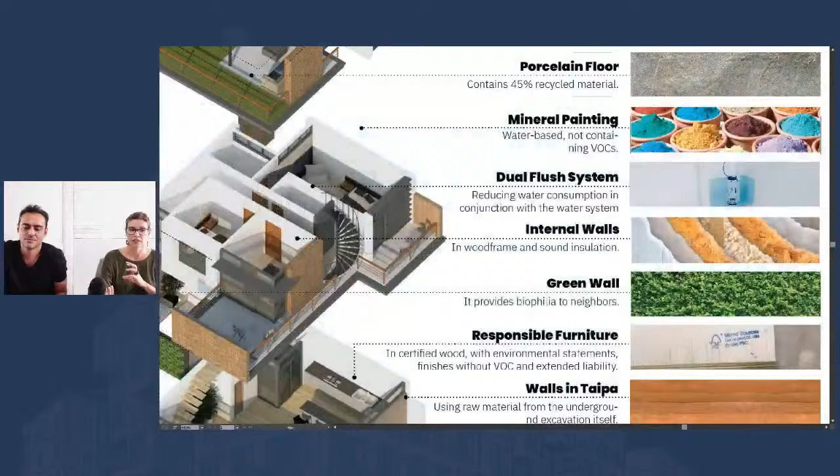Bring me more information about material toxicity, about all the products that compose this material, how much energy is input in the process. What happens when the material is done with its life cycle, which we talked about in the beginning, a lot of waste. Do we want a material that does not have a good end? How can we disassemble this material and bring it back into the cycle? All these questions are what make your choice of sustainable materials.

When you analyze this, you have your sustainable material for your region, that works for your climate, for transportation and low carbon footprint, where the process is good or at least optimized. Then you have something that contributes to thermal loads and has this impact. So materials are not just aesthetics, they contribute to many things, including your health.

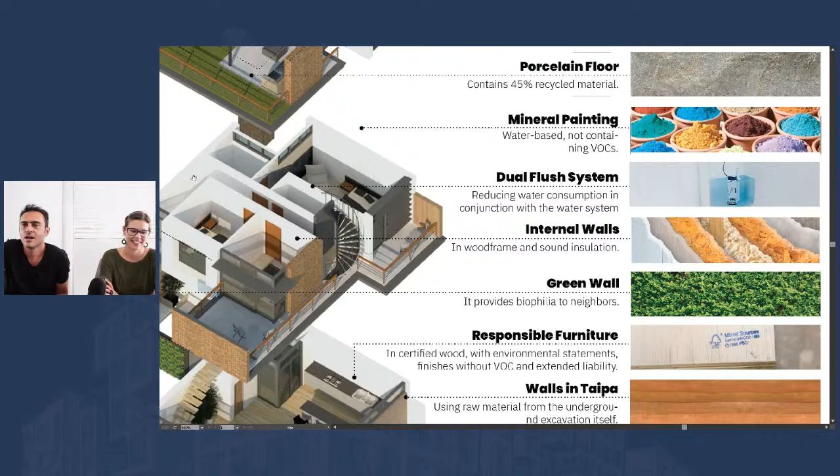Yeah, I was just thinking here. Usually I do bad jokes, but on the first day I think I did the worst joke ever. I don't know how we'll make it worse. Now I have this challenge here, you are going to see me struggling to make some bad jokes, right? Oh yes we do, we do pop culture, we do bad jokes, and we do sustainability. You'll see our portfolio increasing as the day goes by. And many people that didn't believe us on the first day will probably leave and not come back, and they will miss the real bad jokes. Then we put it towards the end because they are the cherry on top of our cake here.

Let's go guys, we want to learn in a fun way. I promise you this, we will make our best to make better jokes. Thank you, the first day is a little extensive, we have things to present, we have ourselves to present, but then we get into the real things. Yeah, and songs, oh my God. Some people have been here before, they are talking about you singing, they already know you Felipe. Yeah, there are some people here that already know. I need to think about a song as well. Oh yes, we tried Bon Jovi last time, did not work, even though I love Bon Jovi.

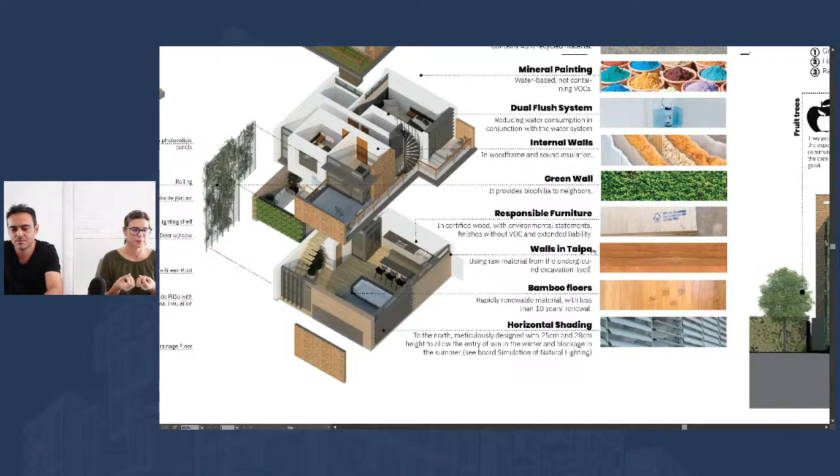Anyways, moving on to our presentation here. The next slide, we have summarized all the systems we have implemented, all the strategies we have put into this house, so our client has a view of everything he is gaining. Do you see how transparent we are being with data and their dream coming true?

When you have a project, you have to understand you have people that envision this project with you, but they don't have as much knowledge as you have to develop this. So make it clear, make it transparent everything he's gaining and why this is important.

When we talk about having a roof garden, why do I want a roof garden? Maybe you have a vegetable garden, maybe your kids can be playing there. This is life quality that you are bringing and helping with thermal loads. So then you are moving them with the emotional part, which is providing for your family a quality of life, and also in their pocket, talking about reducing thermal loads.

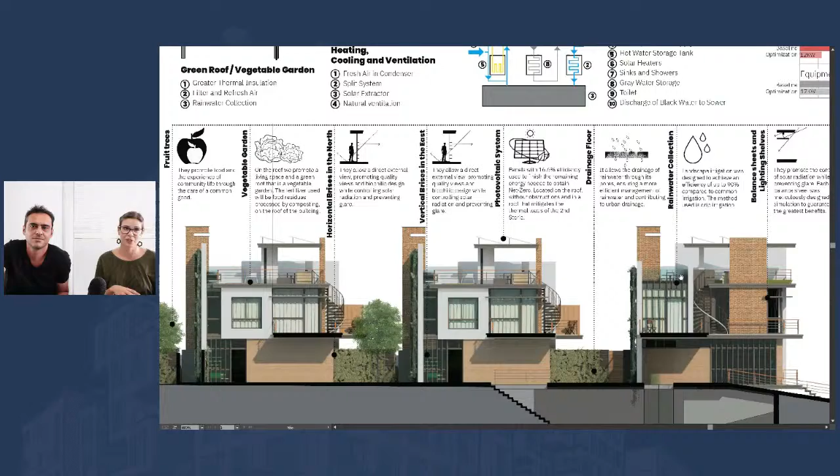When you talk about how they saved with windows, how they save water, all these things are making part of their lifestyle now. You are creating a lifestyle for this family or for this corporation. Many people enjoy where they are working because they have these amenities, they have these things, and they feel part of it, they feel they are contributing to something bigger.

Most of it is when you make this transparent. If you have a green building, you will bet that they will have on every wall how much water you're saving, how much energy you're saving. Why do they have this? Because communication is the key for people to collaborate with this environment. There is no sustainable building if you don't have operation and maintenance that is sustainable.

Users need to be involved to make your building continue to perform. You can design the most sustainable building, but if they don't contribute, they will treat it like any other building, and it won't continue to evolve and make a positive impact. So having them understand is important.

Don't underestimate educating your client.

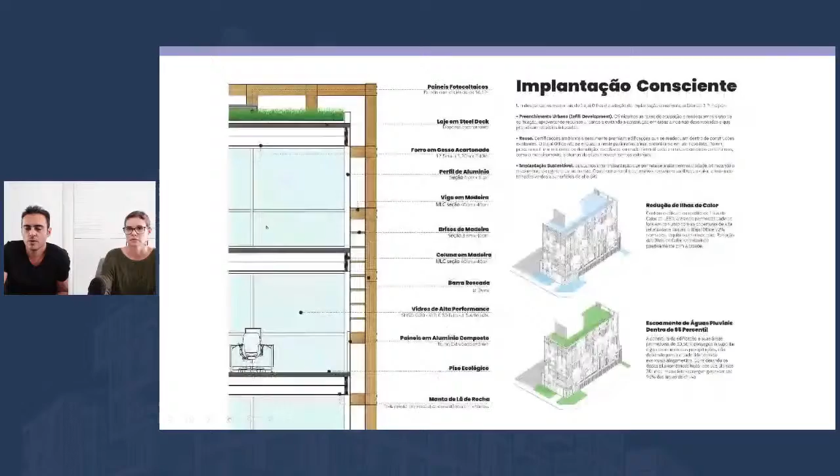We have another project here we won't show, but the process is the same. We have a taller building, we don't have the facade image, it's missing one page, but we use the same strategy and process to increase building performance, thermal comfort, and make people feel better. We have this baseline, so you can do this easily in your projects.

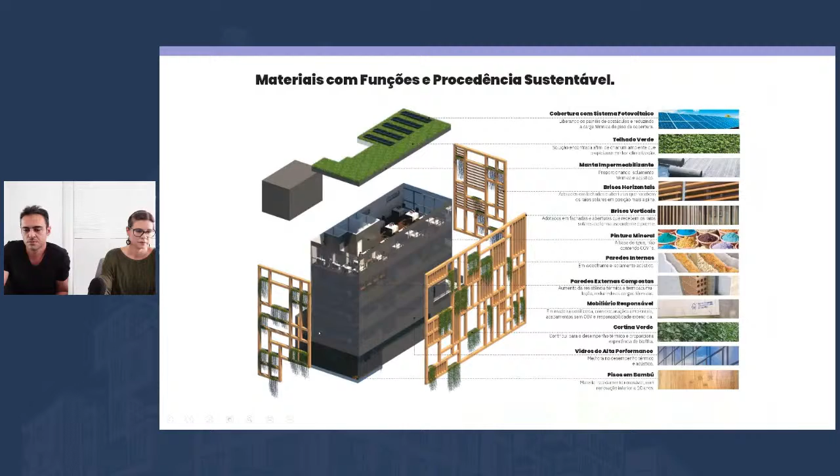This is one project that maybe we can show another day.

Now we need to finish dealing with this pink elephant. We are going to bring some pink elephants here. Sammy said pink elephants are things people who use drugs see. Actually, like in Disney, when Dumbo is hallucinating because he drank too much, he sees flying pink elephants. But that's not what we want here. We want to present elephants that are in the living room, things people see a lot, and we want to take the elephant away from the living room. I don't know how, maybe we should break the door and the wall to remove them, but you understood this. We will remove the pink elephant.

So guys, it's a good time to become an expert in this field. I think there is not a better time than now, because the pandemic increased awareness about health and sustainability.